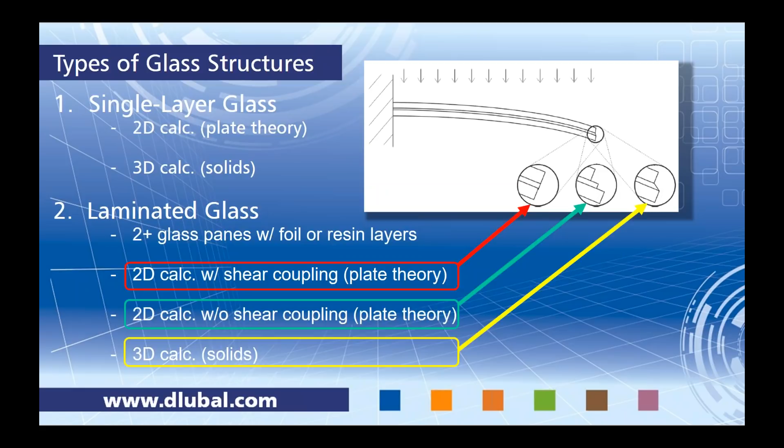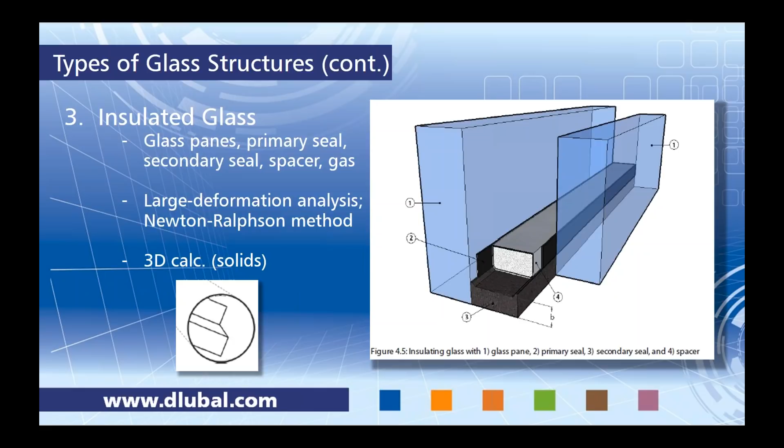Now, for this type of glass structure, we will always run a 3D calculation with solid elements according to a large deformation analysis. And for this large deformation analysis, we utilize the Newton-Raphson method. So plate theory is not available here because the gas layer adds too much complexity to these glass surfaces.

When we launch RF-GLASS, there are two different calculation types that we need to choose from, either local or global. So our first example today will utilize a global calculation. Now this considers the entire model within RFEM. So things like supports, nodal supports for today, boundary members, those are all taken from what we've modeled in the

main program RFEM. Now the analysis options for a global model is 2D only, so we can only run this according to plate theory with a linear analysis. So something like insulated glass would not be available for a global calculation.

Now, the other calculation type is local. So this is where we will actually be looking at an individual glass surface only. Things like support types, boundary members, those have to be redefined within RF-GLASS. And this provides us with the opportunity to get a little bit more detailed when it comes to the support types, where they're exactly framing into the surfaces or the solid elements in this case.

Now for local, we also have the ability to run either a 2D or 3D, plate theory or solid. And so that further allows us to run a linear or large deflection analysis. So this will be our second example today, utilizing the local calculation.

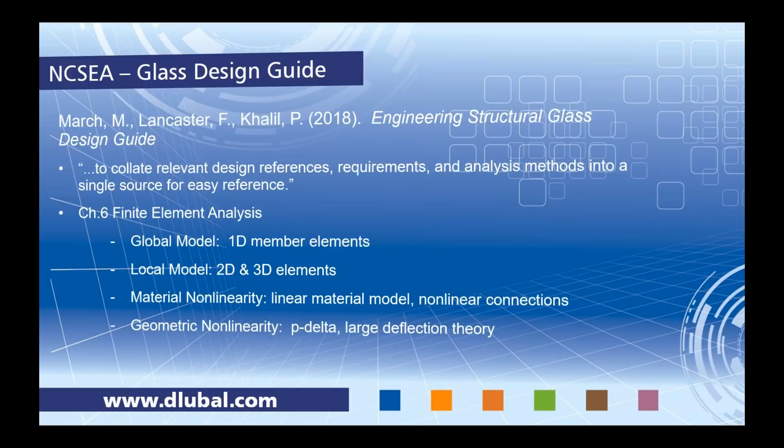Okay, so we are finally ready to jump into our first example. So it's quite common with glass design that we want to integrate it with our own custom extruded sections. These aren't sections that you would find within the AISC or the ADM, but rather there's some type of unique cross section. Well, within RFEM, you most likely won't have access to quickly define this cross section without having to manually calculate all the cross section properties.

So we've created a program called SHAPE-THIN. Now, for those of you who are familiar with RFEM, the interface looks almost identical. So that's nice that there's that familiarity. You can import in an AutoCAD file, but today I'm just going to draw my cross section and I'm going to have the program calculate the cross section properties that I can later bring into RFEM. So what we'll start off with is a new polyline.

And with this polyline, I need to define the thickness of my cross section. So we'll set this to something fairly thin at 0.15 inches. Now, as I draw this polyline, I can also take into consideration a bend radius. And so you can set that bend radius here. We'll choose 0.04. The material must also be specified. Steel A992 is probably default when you first launch the program.

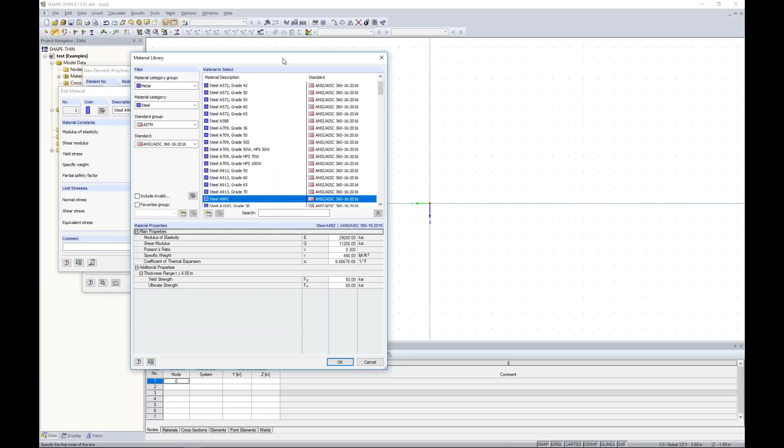And we can just enter into our material database here and use our filters over on the left. So instead of steel, maybe we drop down to aluminum and we take a look at ASTM and further filter to the ADM 2015. Now you can see the long list here of all of the aluminum material. So most likely you'll find what you need. And today we'll just take a look at the T6510 for extrusions, and here are all of my material properties. And I can click OK through these dialog boxes.

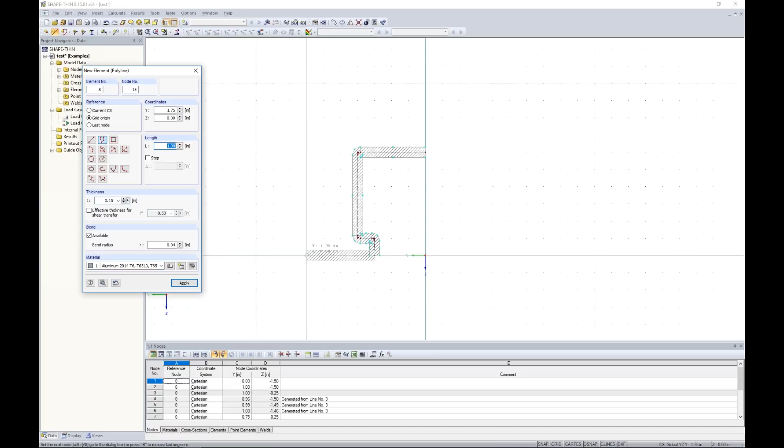So now I am taking a look at my graphical interface here, and I can begin drawing my cross section. So all I'm doing is snapping to a few various points here on my drawing grid, and you'll notice that that bend radius is taken into consideration when I turn these corners. Now I'm only going to draw half of the cross section because what I can utilize are some of these AutoCAD type features that make our lives a little bit more efficient.

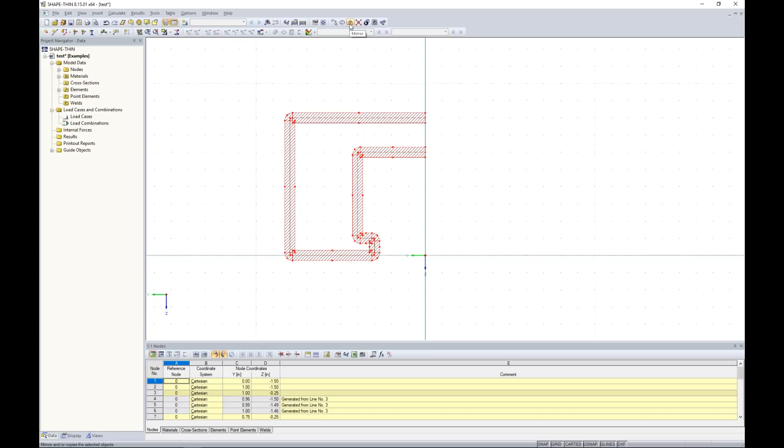So I can select the left side here of my cross section and use my mirror tool. So up here in the tools is the mirror option where I can create a copy and mirror about the origin. I click OK. And just like that, a fairly simple but custom extruded section is created. So I'm almost ready to run the analysis to get my cross-section properties, but I want to jump to materials. For aluminum, you'll notice that the yield strength is automatically set to 0 here. So if I try and solve this, I'll get an error.

The reason why, if we take a look at the aluminum material, is that there are different yield and ultimate strengths depending on if we're looking at tension, compression, shear. So the program simply doesn't know what to use when calculating the plastic cross-section properties. So I can realistically set this to whatever, it doesn't matter, 35 and 40. The reason why is because I'm going to redefine the material once I get into RFEM.

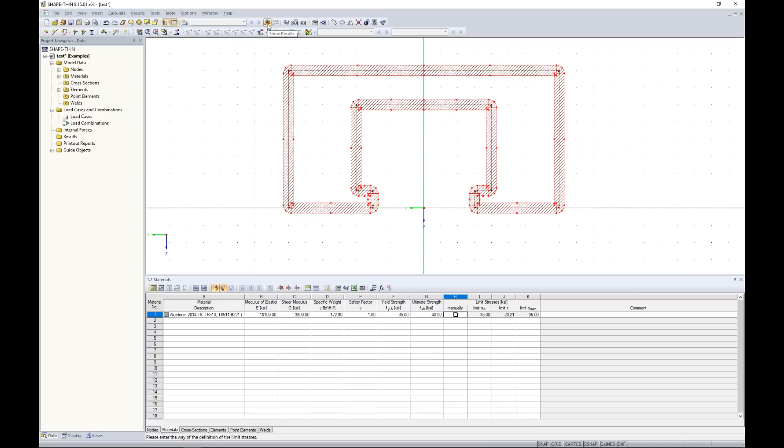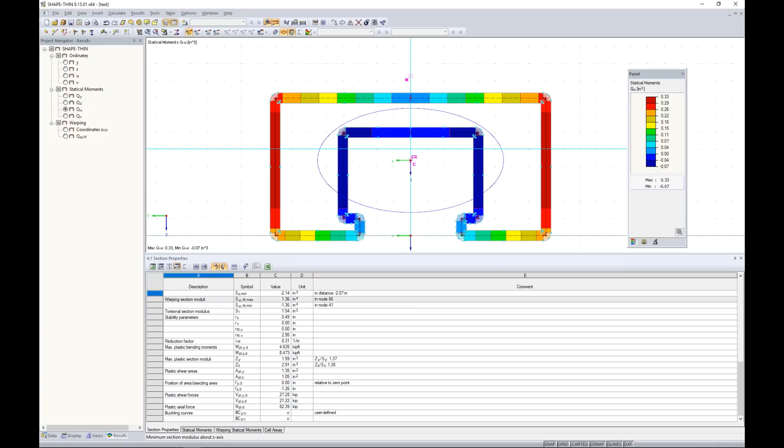So for now, just as a placeholder, so to speak, we can now run the calculation with that applicable yield strength set in there. So in just a second, you can see it solves pretty quick, and now available in my results table are all of the cross-section properties for this custom cross-section. So we want to save the results, and you have to save the results with these calculated cross-sections in order to integrate it in with RFEM.

So now changing programs here, we'll go over to the program RFEM. To begin with, I need to create a model name. For this one, we can call it webinar. Now, the type of model is 3D. The load combinations, this is where we can set the automatic load combination generator according to the ASCE 7 2016. We have the NBC 2015, as well as many other international standards. There are also the older standards if we hit this button here.

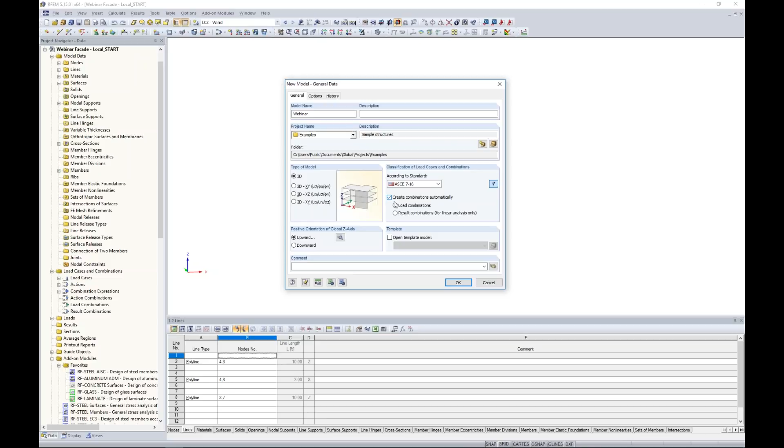So when this checkbox is checked, it will automatically create those load combinations. When I uncheck this, that allows me to just manually define load combinations. For today, we'll go ahead and utilize the program generating these for us. I click OK, and then up pops my new file.

So here's my graphical interface that we'll utilize to begin modeling our facade wall today. We also have our tables down here at the bottom to work with. You can import and export directly to and from Microsoft Excel. We'll certainly be utilizing these quick tools up at the top. And over on the left is our project navigator, maybe a little bit more unique to our program RFEM.

As we begin to model here, all of our input data will be available in these tree type lists. The results will also be available here.

So what I'm going to do is change around my drawing grid to begin drawing my facade wall. I want to start off with a new member, so I click on my new member tool, and the member type is set to beam, and I'd like to take a look at my cross-section library.

Here are all of my cross sections available. This would include shapes from the AISC, from the CSA, from the ADM. You also have these parametric thin-walled sections here, but you'll notice that I don't see that custom section that I just created. It's not an option to choose from.

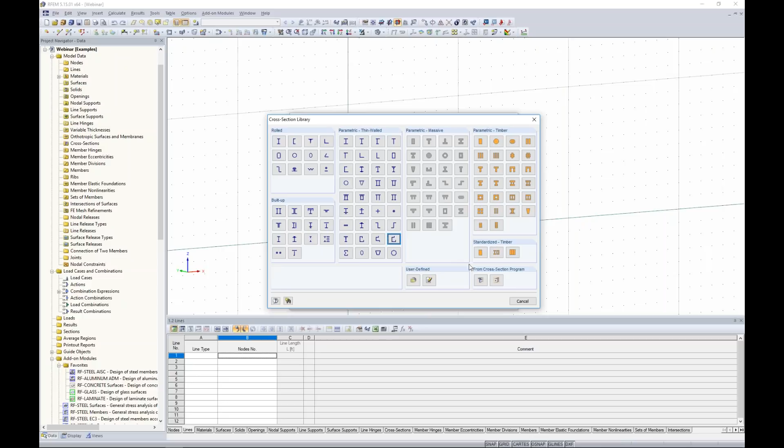So that's why we're choosing this option down here to import the cross section from Shape Thin. Then I just simply navigate to where I saved that file, and there's my custom cross section available to me.

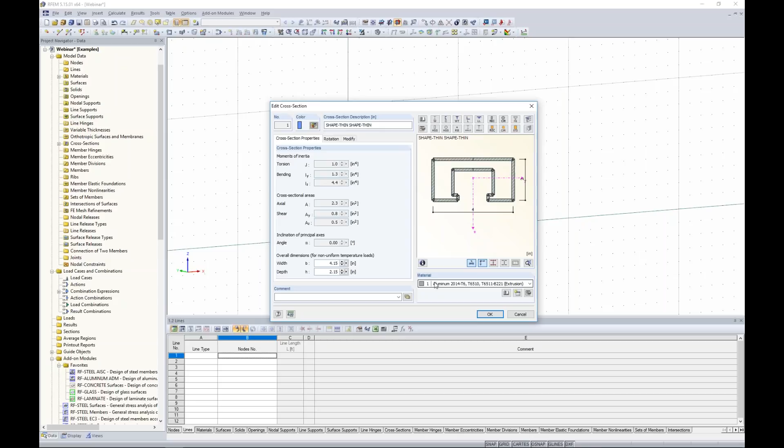Once I load this, I can also modify the material here. Perhaps this was set to steel A992 or whatever default material was in the program, but we can quickly access our material database here. This looks familiar, exactly like what we saw in Shape Thin. We can filter on the left to the ADM 2015 to choose our T6510 for extrusions, and I click OK. Just like that, we now have this custom cross section available to us within our main program, RFEM.

So all that I'm doing here is snapping to a couple points to create my boundary members for my first glass panel. Once I'm done with that, I've created these 4 members, and I want to draw in my glass panel.

We can do this with a new surface element. Up in my quick tools, just like how I drew the beam member, we can draw a surface element. You'll see here we have multiple surface shapes, but for today, we're just going to utilize a typical rectangle shape. This is where we choose the stiffness from our drop-down menu set to glass.

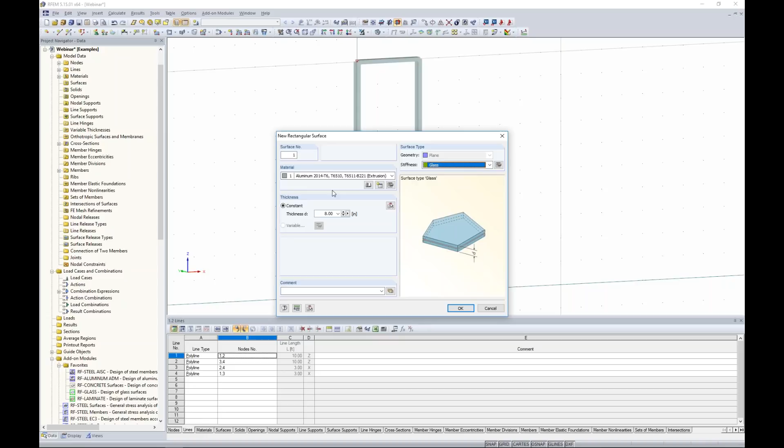As far as the material and thickness, this doesn't matter. We're going to override this in just a little bit of time with the RF glass add-on module. So aluminum, steel, concrete doesn't matter, thickness doesn't matter, that's just another placeholder. So what we can do is just snap from one corner to the other, and then that 2D surface is drawn for us.

Let's also say that we would like to release the moment of this glass panel framing into these boundary members. Maybe it's not a typical connection type to transfer the moment from this surface element to those boundary members and vice versa. So how do we do this?

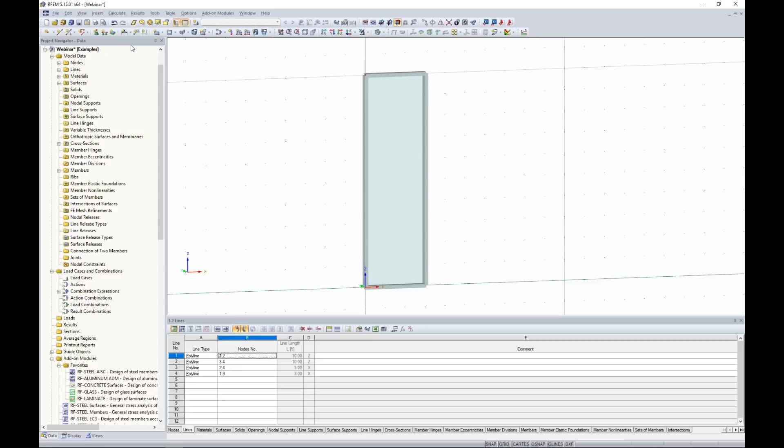Under Insert and Model Data, we have the option for what's called line hinges. I can assign 2 lines graphically, and up pops my dialog box. Right now, I don't have a line hinge definition, it just says none, so what I'd like to do is create a new one.

Here are my 6 degrees of freedom for my local axes according to my line. Now this is not the local axes of my surface, it's not the local axes of that beam, but it's actually the shared line that they have in common. So what I want to do here is release the moment about the local x-axis of the line, which is along the line length, and I click OK.

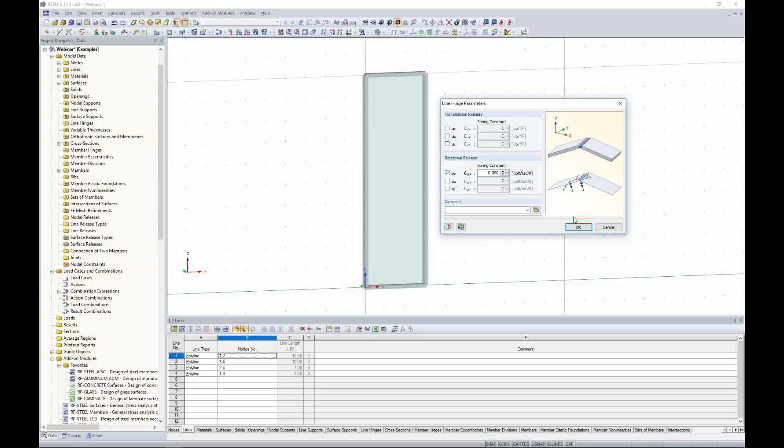So now I can select this surface and then easily click on the 4 line elements on the boundaries, click OK, and now we can see the line hinge shown here with this available symbol.

I am going to select everything here, just like what I would do in AutoCAD for example, and use my Move Copy tool. I'm going to create 5 copies in the displacement vector of 3 feet in the global X direction. I click OK, and now it copied over the line hinges, the boundary members, and these surfaces.

Well, I've decided that for this 3rd panel and this 5th panel, if I hold down my Control key, highlight them, and hit Delete on my keyboard, I want to subdivide these into smaller glass panels.

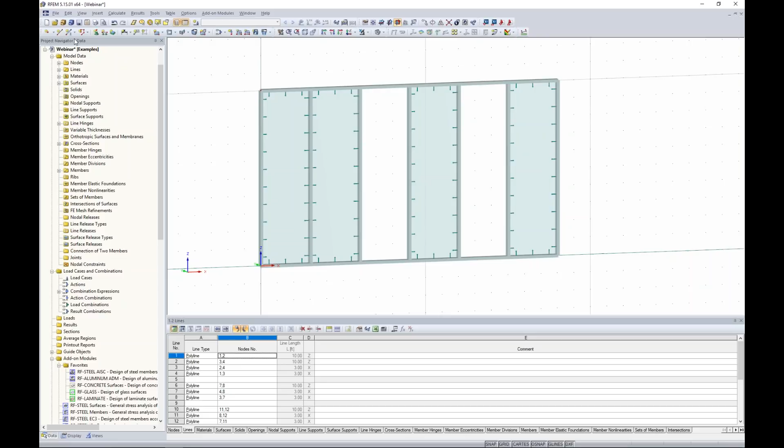For this, I want to draw a new member again. Now my Shape Thin section, along with my material, aluminum, has already been set. I don't need to redefine that, so I'm utilizing the same shape and the same material.

All I need to do is click OK, and then I can begin modeling here to create some smaller glass panels. We'll do the same over here, but just subdivide this one in half, and I can right click. Now I'll utilize this tool up here to connect all of my lines, which creates a node and separates these members.

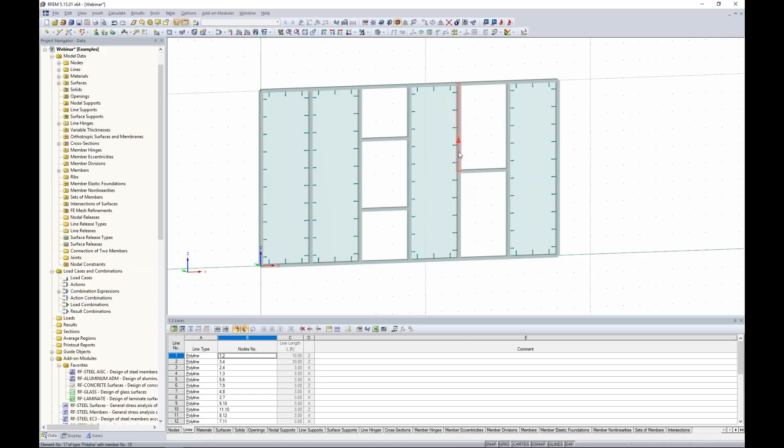Now you'll notice I lost my glass surfaces, so we want to draw a new rectangular surface and set the stiffness to glass. Remember, the material and thickness don't matter at this point, we're just defining the geometry. Snapping from one corner to the other, I can quickly take into consideration these smaller glass elements.

Now I've also lost my line hinges. So under Insert, Model Data, Line Hinges, assign to lines graphically. We've already defined the type, so I don't need to redefine that. All I want to do now is select this glass panel and select the 4 boundary members.

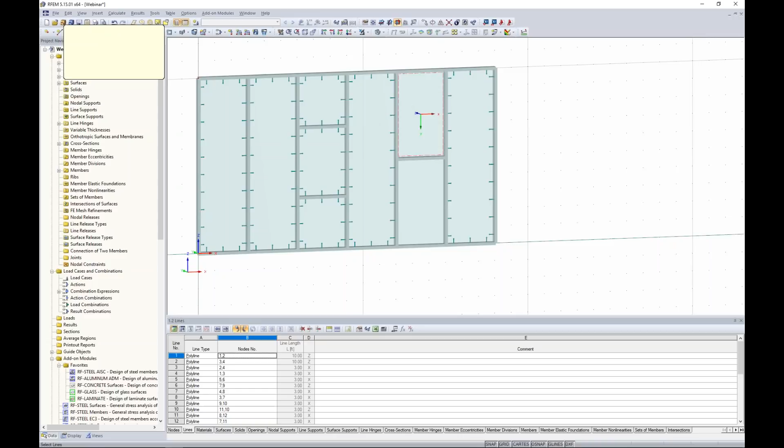And I need to do the same thing for all of these new glass surfaces. You can see the benefit of utilizing that Move Copy tool so that we don't need to individually apply these line hinges to each surface like we're doing now for these smaller segments. We'll go ahead and do the same thing for the 5th panel point location, and finally for our smaller panel here, we are done.

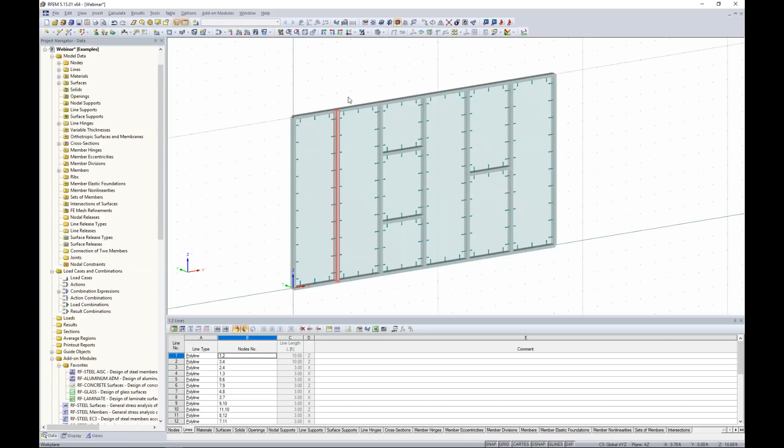Okay, so the geometry is pretty much accounted for, but there's one thing I'd like to adjust. If we take a look at this member here and I choose visibility by selected objects and zoom in, you'll notice I get a great rendered shape here of my cross section from SHAPE-THIN. Although it's custom and we might have some different lips and extrusions, you'll always get a nice rendered view, so I know exactly where the orientation of my members are.

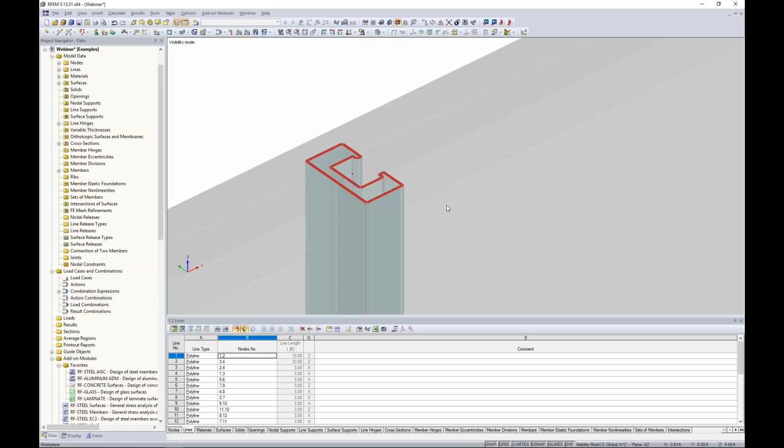Well, for these internal members, I actually want to rotate them 90 degrees. Maybe that's just the type of connection for this facade wall. So canceling out this visibility and rotating this around, let's turn this into wireframe view, and I'll select all of my internal members here. I didn't select the outside boundary members, I just double click on one of the members, and then right away I can adjust the angle to 90 degrees and click OK. So now when I turn back on the rendered view, all of these internal members are now facing towards the global y-axis.

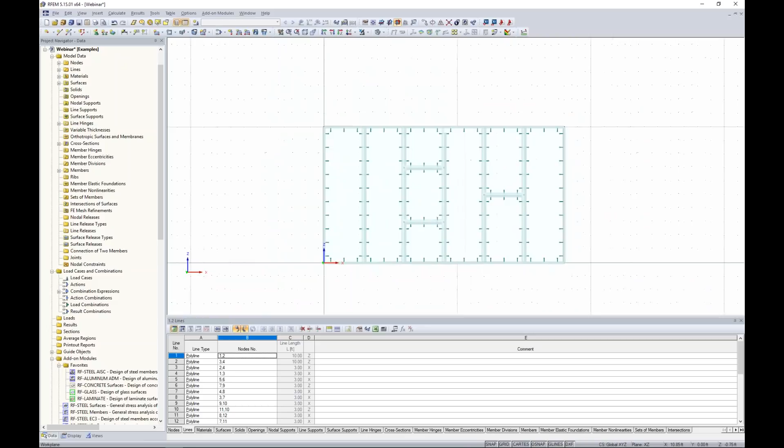So we would like to support this wall. We'll do so with nodal supports, using a simple tool up here, a new nodal support. We have a couple default options here: hinge, which is a typical pin nodal support, and rigid, which is a fully fixed nodal support. For the bottom of the wall, let's just utilize a simple pinned application. I click OK, I highlight along the bottom of my wall here, and I lost it, one second. I highlight the bottom of my wall, and now that pin support will be applied to every node along the bottom.

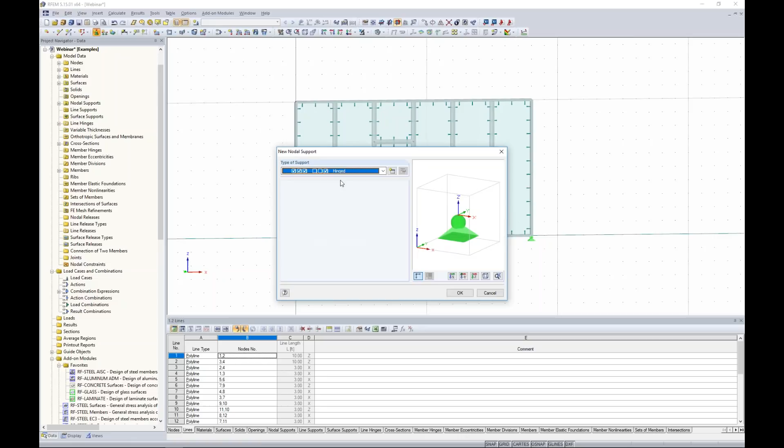As for the top, I also want to apply a nodal support, but this time I don't want to use one of these default options. I'm going to create my own nodal support. Here are my 6 degrees of freedom, 3 in translation, 3 in rotation. I'm going to release translation in the Z direction, so I want this wall to have a roller type support in the vertical direction. I click OK, so now I have this user-defined type of support, and I can highlight the top of my wall here.

So realistically, the modeling of the wall itself is complete. We want to move on to applying a couple loads to this wall. For this, we need to first define our load cases. There's another button up here in our toolbar called New Load Case, and up pops my Edit Load Cases and Combinations.

The first load case is going to be dead load. Now the action category is important because this tells the program what load factors to apply according to ASCE 7. This one will be according to dead load, and self-weight is automatically activated here. For my second load case, we'll call this one wind, and the action category will be set to wind.

Self-weight is not activated here because we don't want to account for it twice. In the combination expressions tab, the program tells me it's going to generate all the LRFD load combinations, which we can see here, and all of the ASD load combinations.

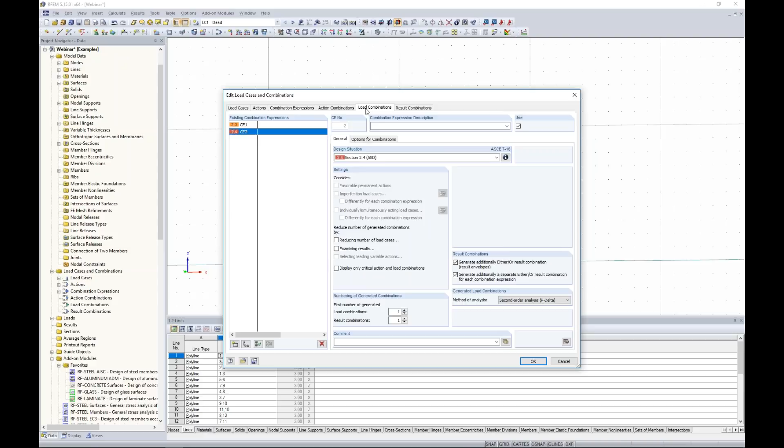To see these individually listed out, let's go to the load combinations tab, and here are my 3 LRFD load combinations and my 3 ASD load combinations. This is a fairly short list because we only have 2 different load cases defined.

So once I'm done setting up my load cases and load combinations, I need to actually apply a load to this wall. To apply a load, we can see these load cases and load combinations generated for us here. Let's make sure we're in the LC1 dead load.

So for dead load, I'm going to make the assumption that I only want to apply self-weight here. Well, remember that's already accounted for within the load case itself, so I don't need to do anything further.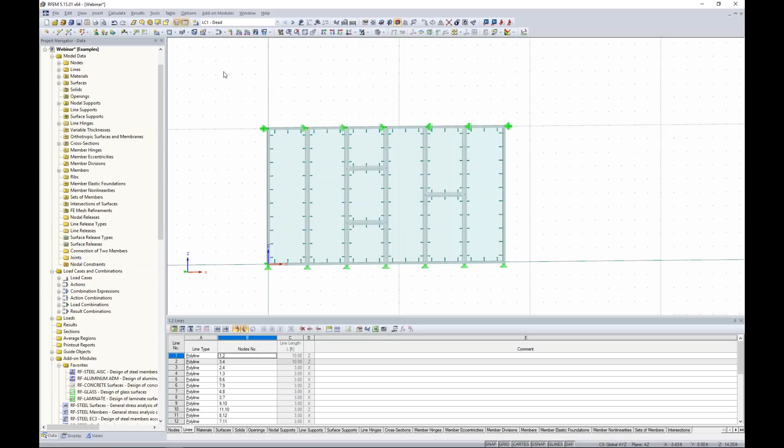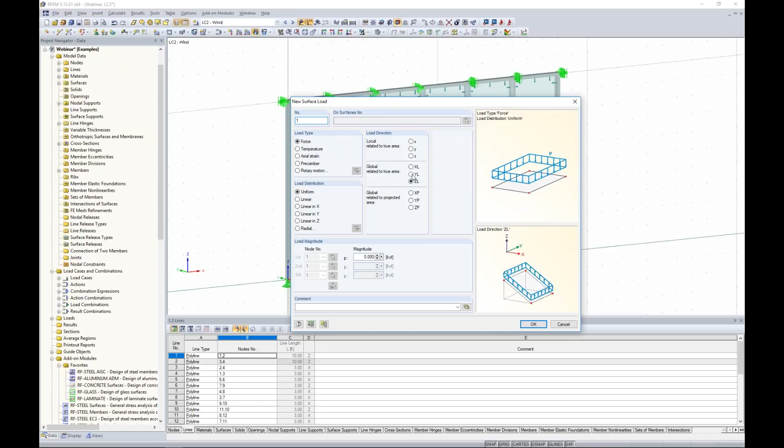As for wind load, I scroll to wind load, and I do want some type of surface wind load acting on the face of this wall. So what I'm going to do is go to a new surface load. Here I'm going to apply a force, and the load direction is going to be in the global Y direction. You can see here my global axes, and I want this load acting on the face of this wall.

The load distribution is going to vary in the vertical direction. What do I mean by that? At the top of the wall, I would like the magnitude to be around 25 PSF, but at the bottom, let's decrease that slightly to around 20 PSF.

The thing I do need to define is to tell the program what's the top of the wall, what's the bottom of the wall, and how I want to vary this. That's easy enough to do by just choosing any arbitrary point first at the top of the wall and a second point at the bottom of the wall. Now the program knows what magnitudes to associate at which points.

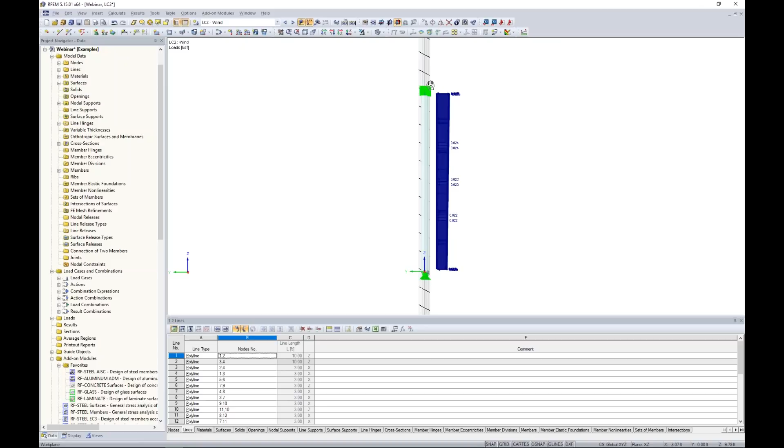I click OK, and then I simply highlight my entire wall. Just like that, we have our wind load applied to the surface here, which is varying in the Z direction. So pretty simple for our loads being applied today.

We can see the load combinations here with the load factors applied for dead load and wind load and so on. So one final thing to do before we jump to the RF glass add-on module is to take a look at our finite element mesh.

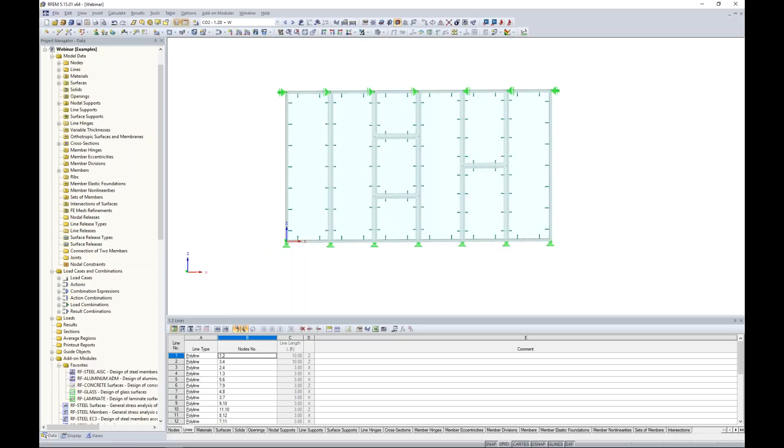Well, these are surface elements, so we want to take a look at the FE mesh settings to make sure we're going to get accurate results. Under Calculate FE mesh settings, the global FE mesh length is always set to 1 foot for a new file or a new model within RFEM. Let's leave it as the default, and here I'm going to regenerate the FE mesh once I click OK.

I can see here that my FE mesh is a little bit too large. I only have 3 FE mesh points along the width of these glass panels. This really isn't ideal to give us accurate results, so it's always suggested that we need to go smaller than this. This will increase our solution time slightly, but in turn, of course, we need to see accurate results.

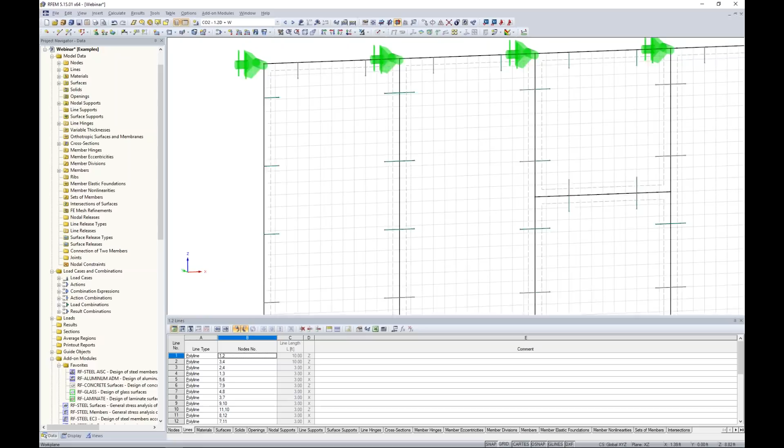So under Calculate FE mesh settings, let's try something like 0.25 feet, and we can regenerate this again. This looks much better, and I know that's a little difficult to see, but maybe we turn this into wireframe view. We can see the FE mesh settings along the width is much smaller, so that looks much better.

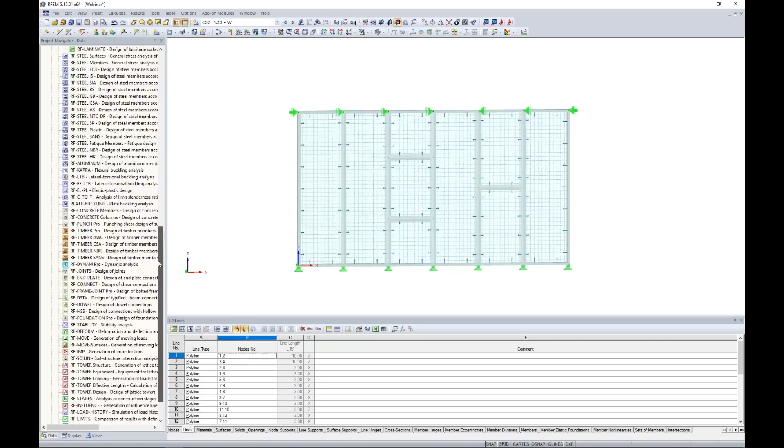Okay, so the geometry, the loading, the FE mesh, everything's done, but remember we still have these glass surfaces here. So this is where I want to launch the add-on module RF glass. Everything you've seen up until now was in our main program, RFEM. In our project navigator, here is our long list of add-on modules, and as you can see, RF glass is one of them. We can launch this add-on module and up pops nothing more than a dialog box. Now, as I mentioned within the PowerPoint, we need to first choose the calculation type.

For this first example, we're going to utilize the global calculation. The standard is set to none because we're just doing a stress analysis and design.

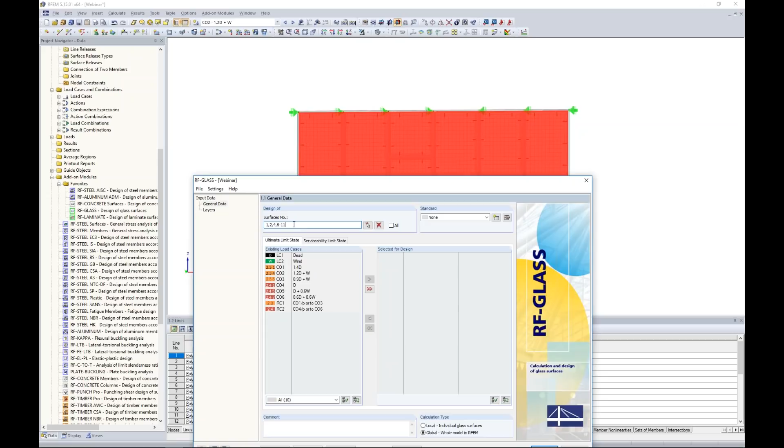These surfaces that we're designing for are all highlighted here because they're all being selected for design, but you don't need to choose every surface if you're not interested in it.

For the ultimate limit state design, we'll choose our 3 LRFD load combinations, and for serviceability, our 3 ASD load combinations. As I mentioned, we can also check deflections. Then it's as simple as working down this list from top to bottom.

So we move on to the layers. This is where we define our different glass layers. The first thing to do is select the surfaces that this first composition will apply to.

I can highlight them all, and you can also create more than one composition. So maybe for these smaller panels, I wanted to use a thinner glass. You could certainly do so all within the same model by assigning different surfaces to different compositions.

So we're going to utilize laminated glass. The first layer type is going to be glass, and here is where we would access our material library.

Typically when you launch this for the first time, you're really only going to see a very small amount of materials that are relevant for the ASTM or the US market. So this is why we give you the opportunity to define your own.

For me, I've created a thermally toughened float glass, and I have placed it in what I call an ASTM glass standard. So depending on the manufacturer, or if you're going off of the ASTM standards, you would simply add that material here with this option to create a new material, put in your material properties, and that will always be available for all file types when you're modeling in RFEM.

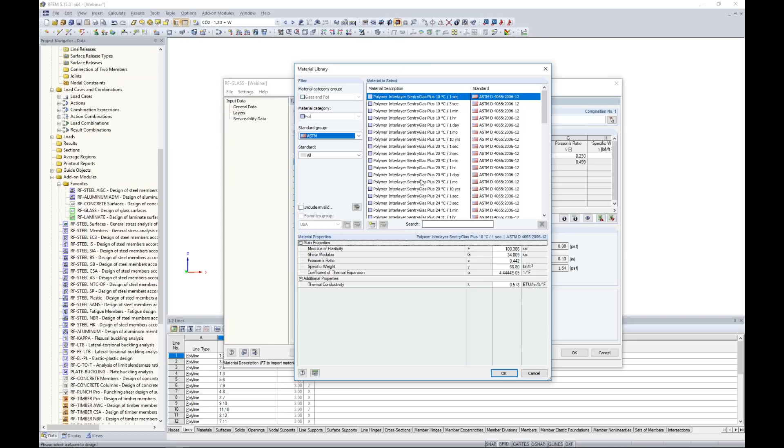We do have a manufacturer here for SentryGlas according to the ASTM. And again, you can always add your own interlayers as well, whether that's a foil, a resin, PVB, and so on.

So for today, we're going to utilize SentryGlas at 20 degrees Celsius. I click OK. The thickness is much smaller at 0.01 inches.

The final layer for our laminated glass panel is going to be glass. The program makes the assumption you want to use the same thickness. That's fine. You'll notice here a graphical representation of my layers, and here is a note showing you what the local z-axis direction is according to these surfaces.

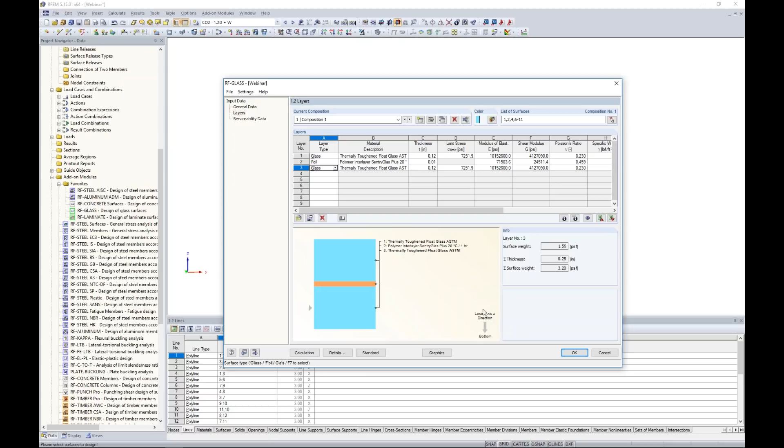It's very important that you pay attention to the orientation of your local axes of your surfaces to make sure you've defined your layers correctly. Now in this case it's completely symmetrical, so it's not so important, but in our next example we'll see where it does become a little bit more important.

You can save these compositions, by the way, and pull them up for any future models as well into a library. So what's happening behind the scenes?

Well, for each individual layer, I can take a look here at the stiffness matrix for that single layer. Now, what the program is doing in this module is taking into consideration all of these layers that I've just defined, and it's creating a global stiffness matrix.

We can actually view that here within this add-on module. This global stiffness matrix is then exported back out to RFEM, and we're going to rerun the analysis here with the correct material stiffness matrix to ultimately get our results back into this module. So that's kind of what's going on behind the scenes.

Now, one last thing to look at here is edit composition details. The only details that we really have here, not too much. We can either consider coupling—and remember, according to 2D plate theory back from the PowerPoint, when we consider coupling, it's a fully rigid shear coupling. When I uncheck this, then we don't have any shear coupling between any of the layers at all.

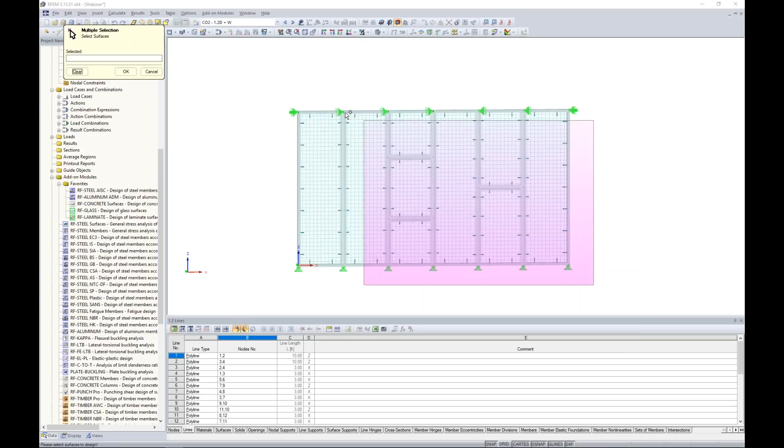So for today, we'll keep this as a rigid shear coupling. And finally, we jump down to serviceability data. Well, we can also design the serviceability checks here. So we can select all surfaces that we're interested in for the deflection. The reference length, well, this is the length that's going to be used in our limiting deflection ratios.

The program has a few defaults here, the minimum boundary line, the maximum boundary line, or you can type in your own length definition. So for today, maybe I use the maximum boundary line of 10 feet, which is the total height of the wall. Is the deformation related to the undeformed system? Is it a displaced parallel surface? So basically, is this absolute or relative that we're supposed to be measuring these deflections from?

Well, today we'll keep this according to the undeformed system, and that's what these pictures show down here to clarify exactly where the deflections will be measured from. You can also set if this is a cantilever surface as well. So the question is, well, we've defined all this information, but what's my limiting deflection ratio? That's controlled under the standard button.

And we can see here for this first line here, because we only have characteristic load combinations for ASD back on the general data tab, the deflection limit by default is set to L over 100 for simply supported, L over 50 for cantilevers. Glass is obviously a little bit more sensitive to deflection than what we'd see with a steel beam, which might be more like L over 300. So by all means, though, you as the user can control what these limiting deflection limits are.

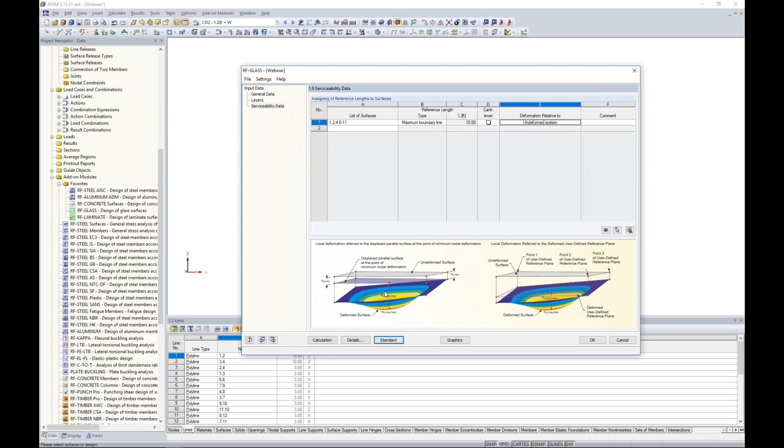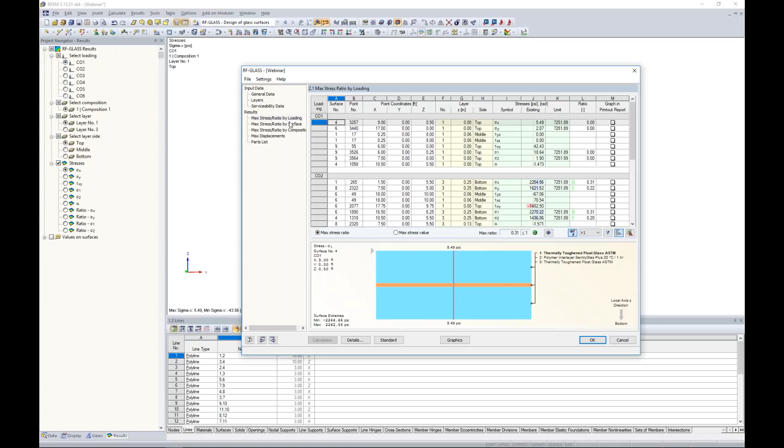And just like that, we're finally ready to run our calculation. Now, this takes a split second, and that's because it's a linear static analysis. We're just exporting out that global stiffness matrix, and then we're bringing back in the results into RF-GLASS. So once it's done with the calculation, our results are presented to us in this table format. We can view the max stress ratio by loading, by surface, so we should have all of our surfaces shown here, and by composition.

So when we're looking at this table, and this is the max stress ratio by surface, you'll notice that as I'm scrolling through my table to different values, the program is highlighting in the background exactly which surface I'm looking at. From there, we can take a look at our normal stresses in the local XY axis, our shear stresses, our normal principal stresses as well. And ultimately, we're seeing the required stresses based on the analysis, as well as our limiting stresses, which is just based off of our materials, and finally, a ratio check for our stress design.

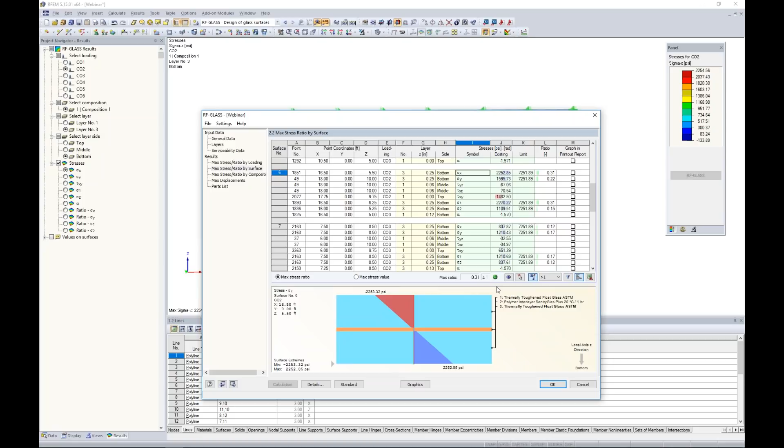The program gives you the summary here. So out of all these surfaces, the max ratio is 0.31, so relatively low. And we have our nice green smiley face here because it's less than 1.0. If you're seeing a red sad face there, then you know that you probably are a little overstressed and you're over 1.0. The max displacements, this is our serviceability check.

So we can see the displacements based on the analysis. We see our limiting displacements based on that L over 100 ratio. And then we have a serviceability ratio given to us, with the controlling one being 0.61 along with our green smiley face. So remember, for any of these tables, you can export directly to Microsoft Excel for further sorting. Excel is going to have much more capabilities when it comes to that. The parts list is also given here, which is a material takeoff.

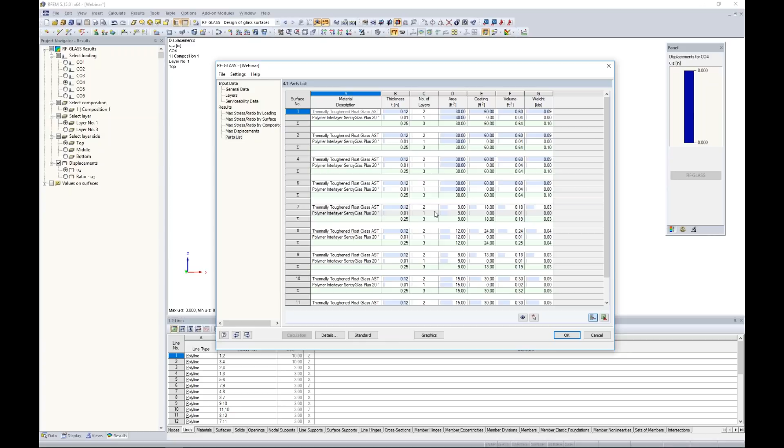Now, the tables are nice, but it's also beneficial to jump to our graphics view. So with our graphics view, we are technically still within this add-on module. You can see it here from our drop-down RF-GLASS, but we're viewing all of our results graphically back within RFEM. And now our results tables are presented to us here under the Project Navigator. We see our loading combinations.

From here, we can view the two different glass layers. Remember, we have one on the inside and one on the outside. And even furthermore, you can view the top, the middle, or the bottom stresses for each layer. From here, the stresses are given to you that you can scroll through, whether that's shear stresses. Maybe you want to take a look at ratios here, however the stress checks come out.

And that's all available to add to your printout reports. Maybe you want to make section cuts through this, so everything is possible here graphically. So that really sums up a global calculation type within RF-GLASS.

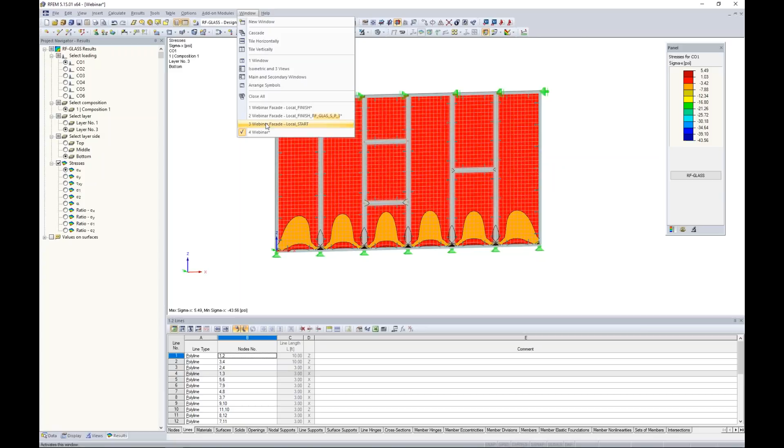So let's say that we ultimately decide we want this to be insulated glass instead. Well, remember, for insulated glass, we have to run a local calculation. And a local calculation, well, we can only really consider one glass element at a time. So we're going to take one of these panels, and what I did under a different file here is I've just simplified it. So I just took one of those glass panels, kept the supports, kept the boundary members. I even kept these same wind loads the same.

And for the second example today, utilizing insulated glass, we want to launch RF-GLASS again. Now, when we launch this add-on module, the calculation type here will now be set to local. The standard is still set to none. The surfaces that I want to design, well, we only have one surface here, so let's move forward with this one.

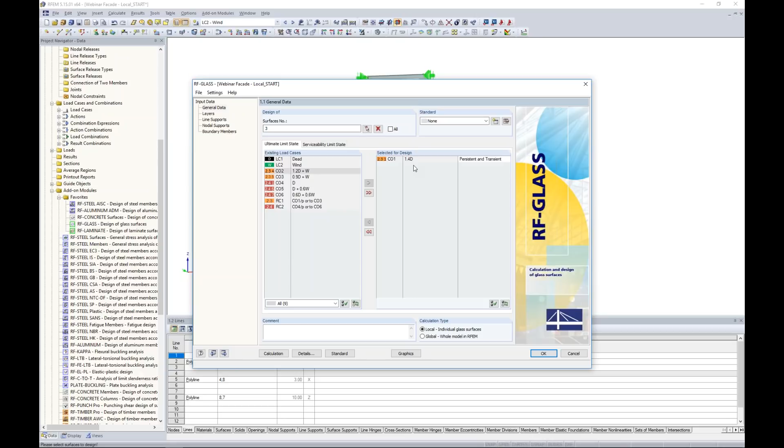As far as the load combinations, I'm actually going to come back to this. Right now, I'm just going to put a simple placeholder in for my LRFD design. And the reason why is we're going to make some adjustments here with climatic loads later on. So in just a minute, we'll get back to this. In the meantime, we simply move up or down our list over here. And you'll notice a few more tables are available now.

So the first thing for our layers, and this should look familiar, we want to select our surface here, surface number 3. The layer type is going to be glass, and I still have my thermally toughened float glass from the ASTM with a thickness of 0.22. The next layer is going to be gas, and this is where we can utilize our material library here. We have a few gases implemented. Again, you can always add your own gas. For today, we're going to utilize argon with the gas properties given here.

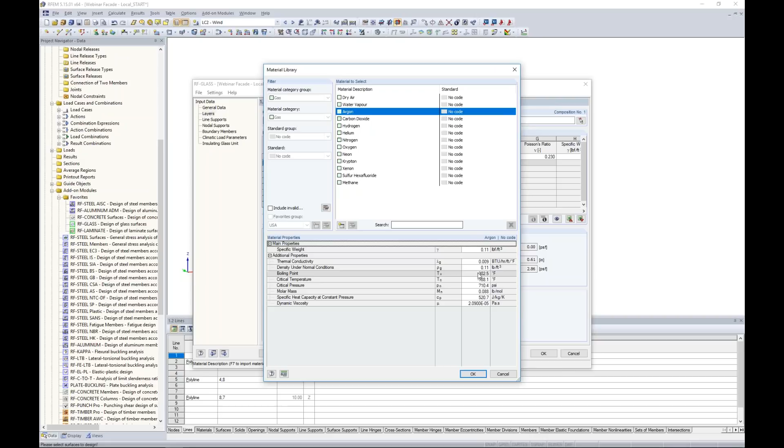The third layer is going to be glass as well at 0.22 inches. The fourth layer is going to be my foil. And again, I'm going to go back to my material library here, and I'm going to choose that SentryGlas Plus 20 degrees Celsius. I click OK. The thickness is 0.01 inches, and my final fifth layer is going to be glass again at 0.22 inches. So there are my 5 layers.

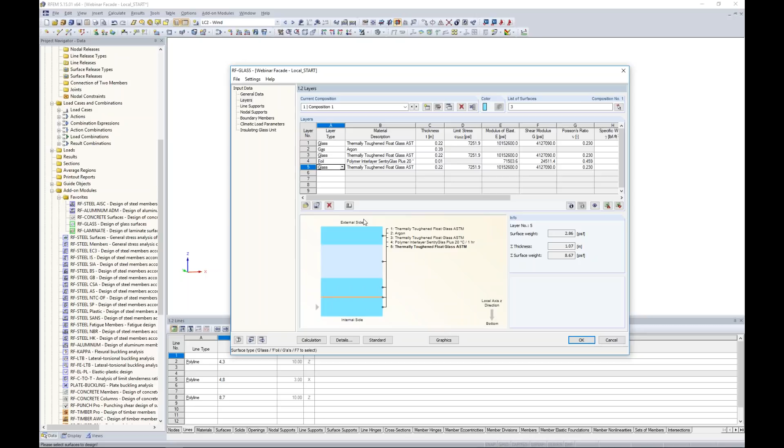Now you can see the profile here of our different layers, and this is why it's incredibly important to pay careful attention to your local z-axis. Even more so with insulated glass, the program has to determine what's the external side and what's the internal side. So if these don't match up to what you'd like to see, in our case, we want the gas closest to the external side, then you need to make some adjustments here with your layers to make sure that those match up.

Let's take a look at the composition details. So this is quite a bit more information than what we saw with our last example. Remember, we only had shear coupling to consider here. Well, now you can see the method of analysis is automatically set to a large deformation analysis. And this is because we have introduced a gas layer into these glass surfaces. And we run this according to a Newton-Raphson.

The modeling of the laminated glass. So this is interesting here. This will also be a 3D calculation utilizing solid elements. So by the way, in the background, once we run an analysis, that 3D model is going to be created with solid elements instead of surface elements.

So what we can do here to consider coupling, we also have to utilize 3D elements for the laminated portion of our glass. But if I uncheck the coupling, then it will automatically use plate theory for the laminated portion of my glass here. Today, we're going to consider coupling and just utilize solid elements throughout the entire surface of this glass panel.

Save created temporary models. So I just mentioned that in the background, the program is going to regenerate this entire RFEM model. And instead of 2D surface elements, it's going to create 3D solid elements. And that's all going to go on behind the scenes, but you do have the ability to save that created temporary model and to actually pull it up like you would any other RFEM model. And I'll actually check this here and I'll show you what one of those looks like.

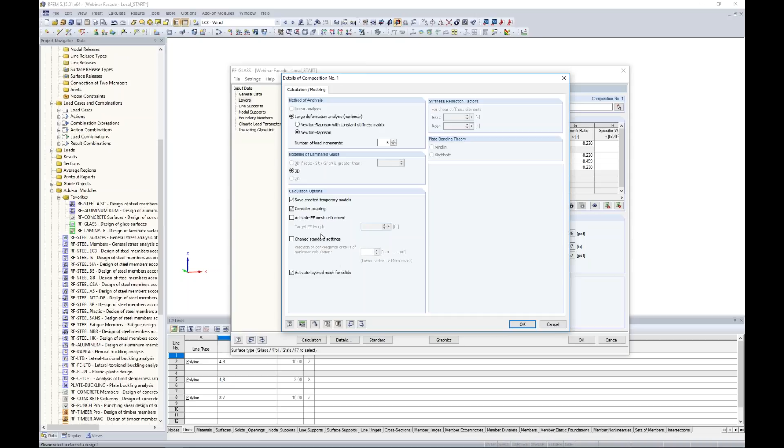Then we just have some further FE mesh refinements here, and we can click OK. So line supports and nodal supports. You remember from the PowerPoint, I said that you have to redefine your support types with a local calculation. Technically these support types shown in RFEM now will be completely ignored. That's why we need to redefine it here.

But the program is smart enough to make an attempt at defining what you already have drawn in the RFEM model. So as you can see here, my 2 support types are shown, and the program has some support type defaults here. Now, these support type defaults, if you want to find out more information, number one, you can click on any of them and you can see our 6 degrees of freedom here and how exactly the program is supporting each glass layer. Remember, we have 3 glass layers for this insulated panel, so the program will support as such.

Now, if you want any more information, our help file under this little question mark here in the corner really explains a little bit more clearly what's going on. Now, in our case today, I don't really like what the program is suggesting. So instead, I'm going to individually define my support types. So the first one will be node number 4, which is my lower node here. And instead of hinge type 3, I'm going to choose user defined.

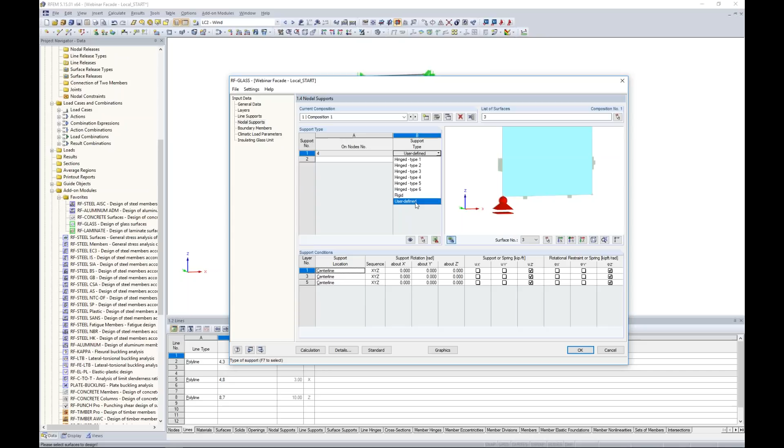So now when I scroll in here, we can see our different glass layers along with our gas right here, but I can only support the glass. So for my middle layer of glass, I'm going to set this to none. I'm only going to support layer number 1 and layer number 5 at the center line, and I'm going to apply a basic pin support at these locations.

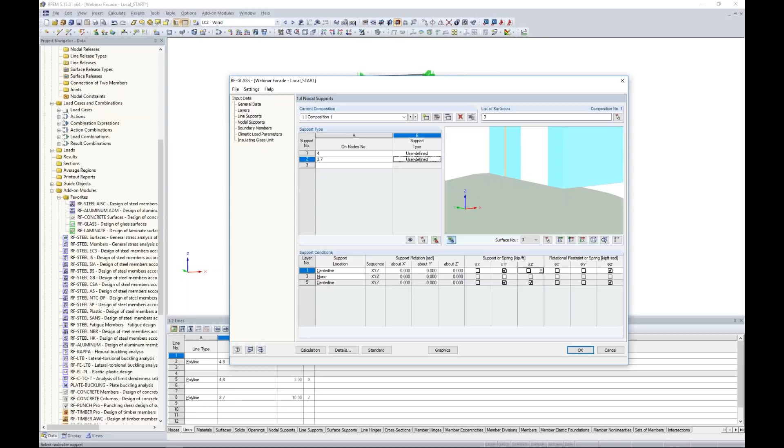Now, let's go ahead and graphically select a couple different nodes here. So we're going to select the upper 2 nodes, and this will also be user defined. I'm going to not support the center layer, and as far as layer number 1 and layer number 5, I'm going to release the X and the Z here. So now we have some type of roller support, and I can zoom up here to see these nodal supports being applied up here to the top. So they're a little large, but essentially you get the picture. It's being applied to those different glass layers.

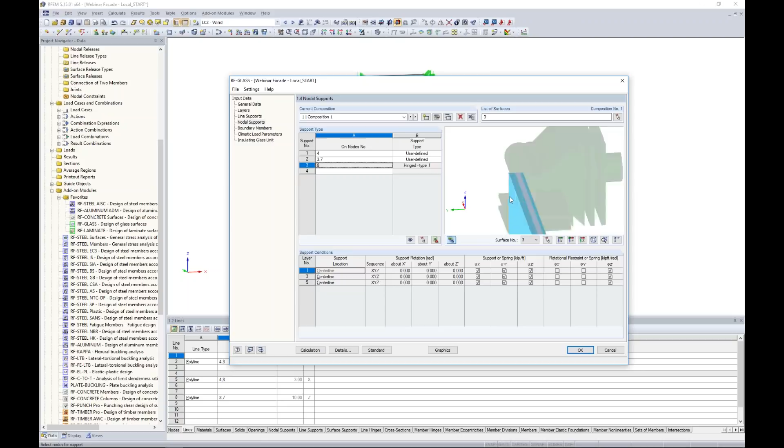And finally, we have one more node to define, and that's in the lower right corner. I click OK. Again, we can zoom out here to view that in the smaller picture. And we can zoom in. Now for this same concept, we're going to go to user defined. We're not going to support the center layer. The 2 outer layers remain a pin support, but I want to have sliding in the X direction. So now I have manually defined these support conditions. So you can see a huge difference here of utilizing those 3D solid elements and how much more detailed you can get with your support types.

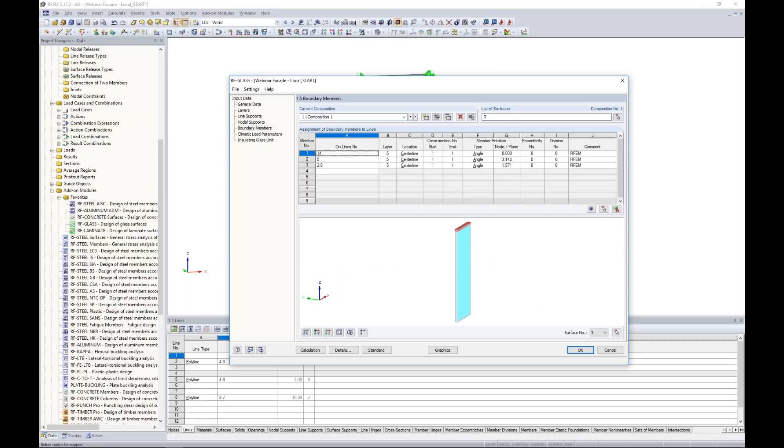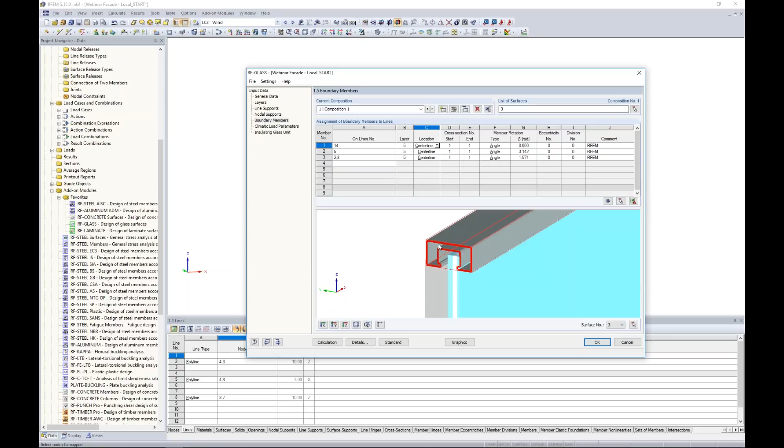Now, the boundary members, same concept as our support conditions. If I zoom in here, well, here is my custom cross-section from SHAPE-THIN. But I need to tell the program where exactly to apply these boundary members. How do they frame into these glass panels? Well, again, the program makes some suggestions here. The program notices, hey, I see boundary members in RFEM. Let me go ahead and attempt to put them into this glass module as well. Well, this is where you can see we have glass layers 1, 3, and 5 that we can apply it to, and even more so, you can apply it to the upper edge, the center line, or the lower edge. For this case, we will just keep the program suggestions for the boundary members.

Number one, where is this glass panel going to be manufactured and what is that atmospheric pressure? Well, let's assume it's somewhere at sea level where the atmospheric pressure is around 14.7 psi. The altitude is 0 feet and the average temperature during the summer is fairly cool at 65 degrees.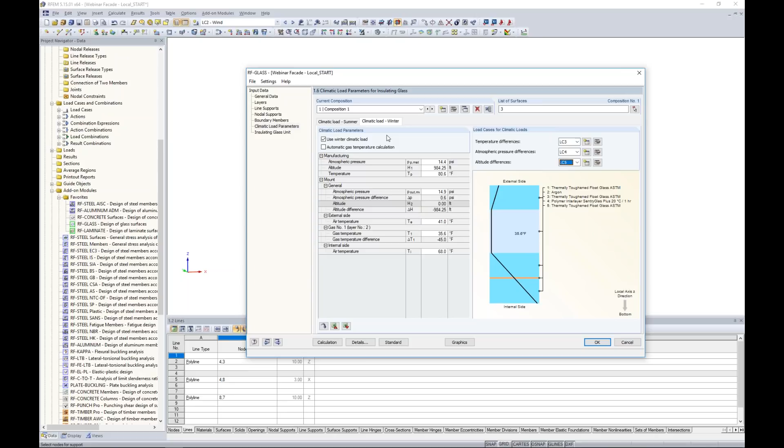So climatic load for winter, now I think we understand the idea. For the sake of time, I'm not going to fill out all of these, but we'd want to give it the same information for winter conditions. Now, the load cases for climatic loads, what we can do is still utilize these same load cases that I created for summer. And that's because the program is smart enough to recognize that the gas pressure that's happening during the summer isn't going to occur with the winter. Those won't occur at the same time. So what it's going to do is create two separate load combinations, one for summer and one for winter. So that's why we can utilize these same load cases.

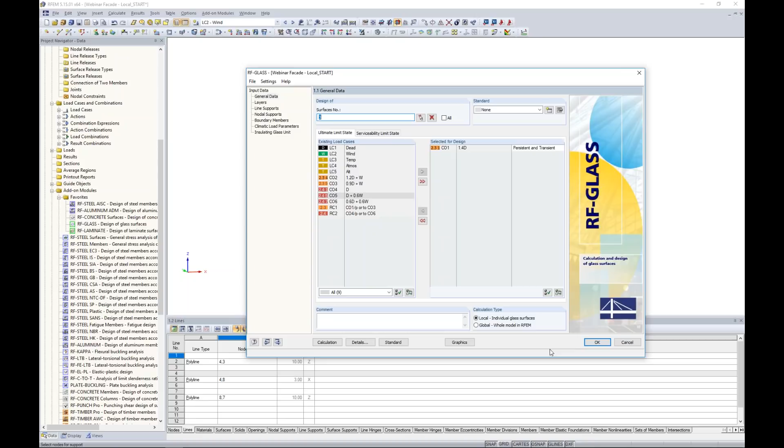So remember, I said way back when on the very first tab that we needed to get back to this. Well, now I see those additional load cases here, but I don't see my load combinations generated. And that's because RFEM is the program that controls the generation of load combinations, not RF-GLASS. So what we want to do is to quickly go back to RFEM, and all I need to do is to utilize this drop-down. The program automatically updates, and now here are all of my load combinations with those new temperature, altitude, and atmospheric pressure loads. So you can see a much, much longer list now.

Now when I go back into RF-GLASS, those are all available here for design. So you can move all of the LRFD load combinations here and serviceability. If you'd like to consider all of them as well for deflection checks, you can move all of them over here as well. So that's how the climatic load cases come into play and why we need to update those after the fact.

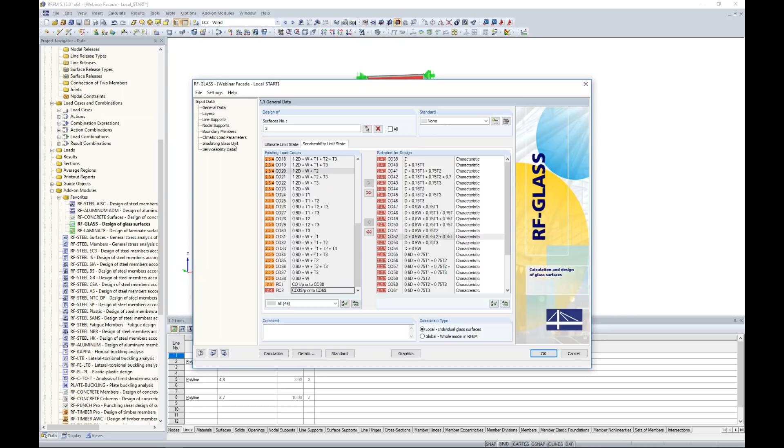We have our gas layer, and our gas layer on either side has glass layers. Now, glass is relatively stiff, somewhere around 10,000 KSI. The program will automatically model a soft material at the edges, something more around 1.5 KSI.

Now, when we choose the option with secondary seal, we turn this on, giving you the opportunity to define the stiffness of the secondary seal as well as the spacer, so that you can accurately consider what that stiffness should be. That's why we now give you the option to turn on or off those helper supports. If you'd like to define the stiffness exactly, turn off the helper support and you'll get the exact behavior there. For us, we're going to turn this off today, and we're just going to use those helper supports.

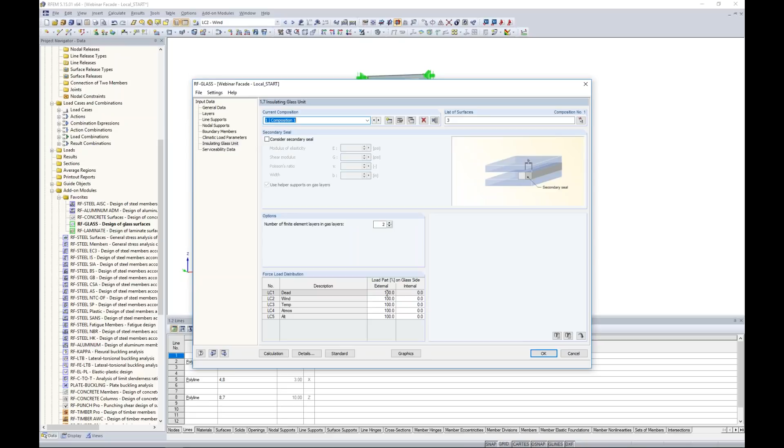The force load distribution. Here are my 5 load cases: dead, wind, temperature, atmosphere, altitude. The program needs you to define at what percentage is applied to the external part of the glass and what is applied to the internal. For dead load, it really doesn't matter because we only have self weight defined. But maybe if we had some other dead load applied, such as a line load on top, you'd want to apply 50% to the external, 50% to the internal.

As far as the wind load, we want 100% acting on the external, since it's an outside load acting on the face of the surface. So let's keep 100% there. Now, as for temperature loads, really this is kind of up to you as the engineer. Maybe you want 50% on the external, 50% on the internal. Same goes for the atmospheric pressure, and finally the altitude as well. We just put 50 and 50 for all of those.

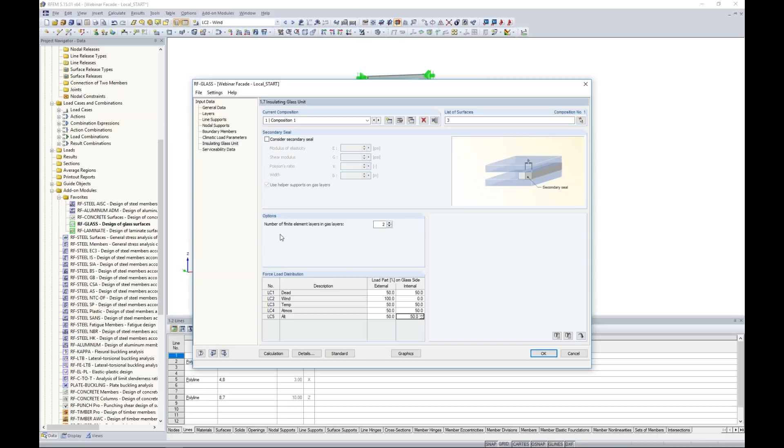Lastly, serviceability data. We don't need to go through this in detail again because it's exactly the same as before. We're going to choose our maximum boundary line of 10 feet. We're still comparing to that L over 100 deflection ratio, and the deflection is based on the undeformed system.

So now we're finally ready to run our calculation. As you can imagine, we now have a lot of load combinations to solve for, not to mention the program behind the scenes is creating these 3D models and generating the gas pressure, so it takes a little while to solve. Instead, I'm going to jump to an already solved model here.

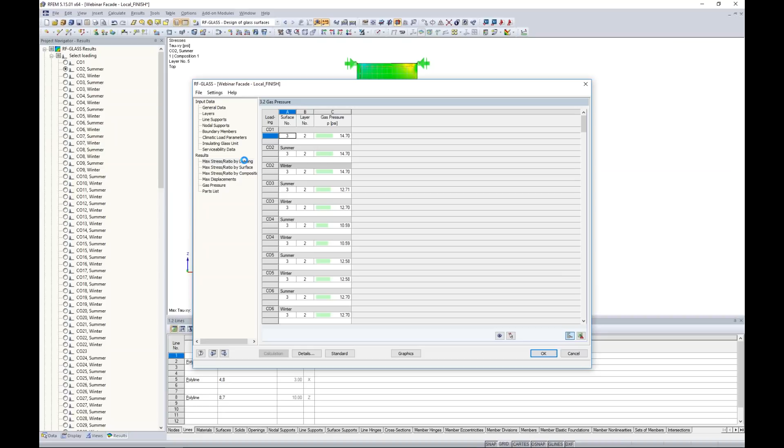This is what would be presented to us within the glass module. This looks pretty familiar—we'd see max stress ratio by loading, by surface, by composition. As we can see here, we only have one surface. We can take a look at our normal stresses, our shear stresses, and ultimately get a controlling ratio for our stress design. For this one, relatively low, 0.19.

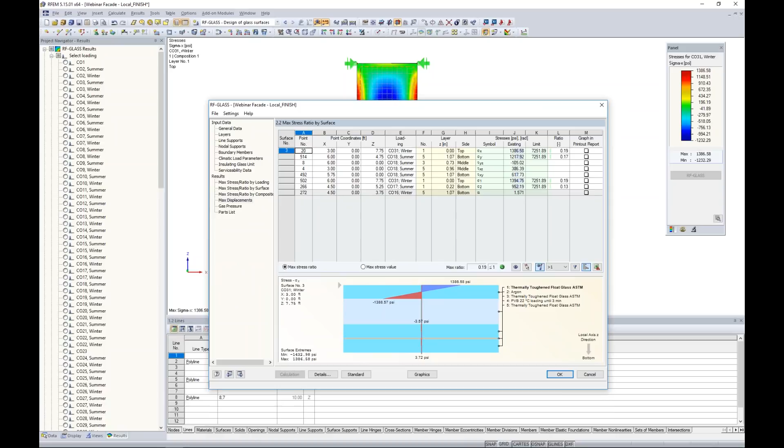Again, we can check displacements. The controlling ratio here for a serviceability check is 0.43. A new table would be gas pressure. As I mentioned, the program is smart enough to determine that there needs to be 2 separate load combinations, one for summer and one for winter. Here's load combination 2 for summer and for winter, same thing for load combination 3—you see summer and winter. So these are the different gas pressures you're going to see based on summer versus winter.

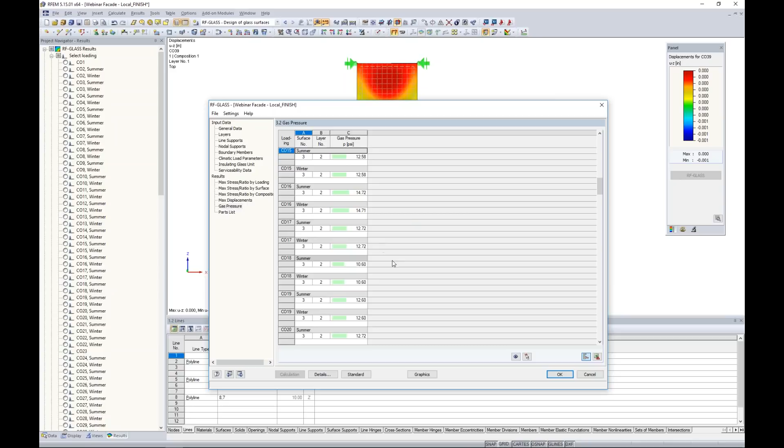Now, of course, it's always beneficial to jump to the graphics, and here is my very long list of load combinations. This was an exhaustive list—maybe for your design purposes you don't need to consider all of these different scenarios, but it is possible if you'd like to. From here, we're just choosing a single load combination to view graphically, and just like what we saw with our global example previously, we choose one of the glass layers. This time we have 3 glass layers, layer number 1, 3, and 5. Then we can view the stresses for all of these different layers and all of these different load combinations.

So really, that's what I wanted to show you with the results of this local model. But there was one other thing I mentioned - that we were going to save these generated models the program's creating behind the scenes for our solid elements. So this is the model that I have saved in my folder.

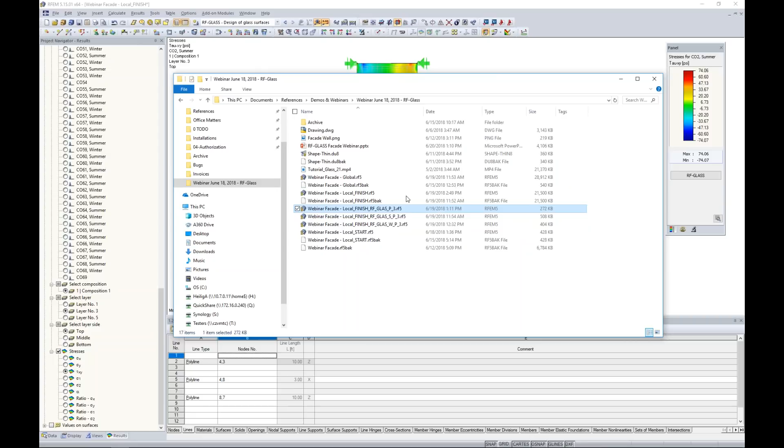The program will automatically generate 3 additional models: RF glass summer, RF glass winter, and one with RF glass without those climatic loadings according to temperature. If I open up one of those, this is what you're going to be seeing - the program automatically generated your exact same model behind the scenes, and you can pull it open here just like with any other RFEM model.

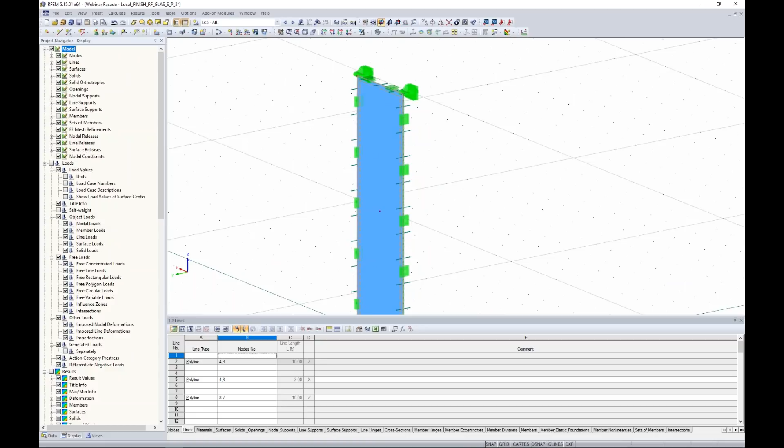Let me jump to the display type here and turn off the display of my members, turn off the display of my nodal supports, and zoom in. Now you can see, instead of a 2D surface, the program is automatically creating these solid elements to represent each layer. Here's my gas layer, here's my glass layer in the front, here's my laminated glass in the rear.

The other thing you'll notice are these helper supports - those rigid connections that the program places at the edges to make sure we get the desired deflection. Again, the boundary members are shown here, here's my custom shape thin section, as well as the nodal supports, which are defined on the individual layers that I applied them to. So this is what's going on behind the scenes.

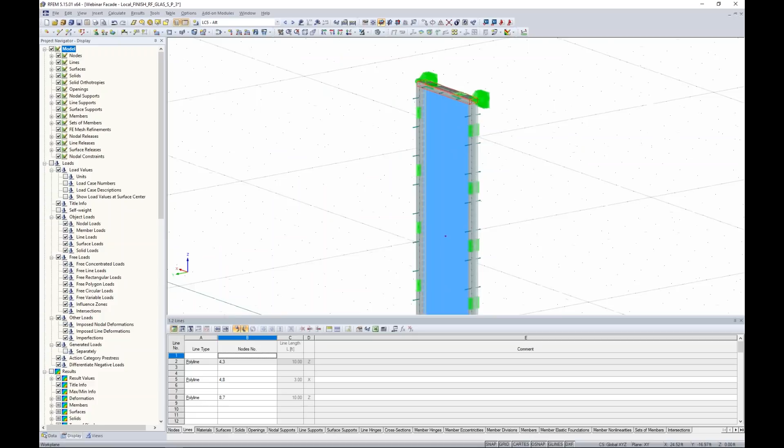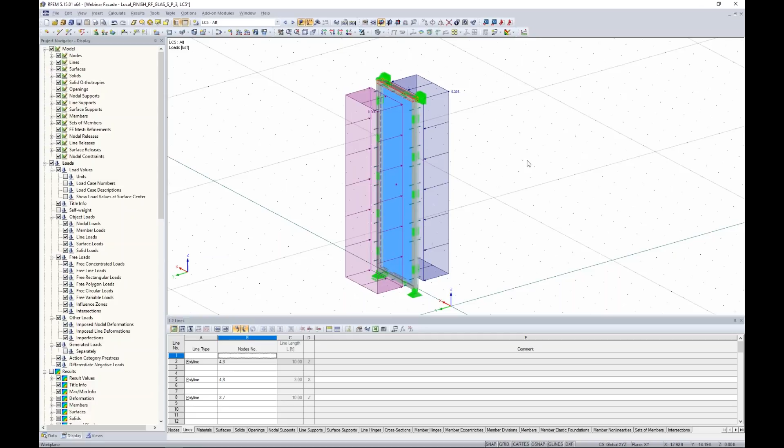And even further, you can take a look at the applied loads. We have the temperature loads and the atmospheric pressure shown here. I've applied 50% to the external, 50% to the internal - you can vary this how you see fit, but this is what the program comes up with for those gas pressures applied to the surface and to the solid elements based on those calculations. Same thing with altitude as well. So it's kind of interesting to see what's going on behind the scenes with a local calculation.

Okay, so now back to the PowerPoint to conclude this webinar.